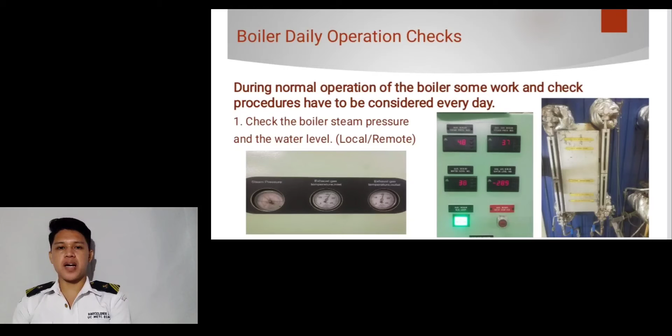Now let us start with boiler operation daily routine. First, check the boiler steam pressure and water level, local or remote. Why do we need to check the steam pressure? Because if the steam is not enough or doesn't meet the required steam supplied, it may affect the whole operations on board. Second, check that the feed water control system is operational.

It is necessary to check whether the feed water control system is operational or not, because if feed water is very low or high, it will send an alarm and it will delay the ship's maneuvering, and worst, it will cause severe consequences, which is explosion.

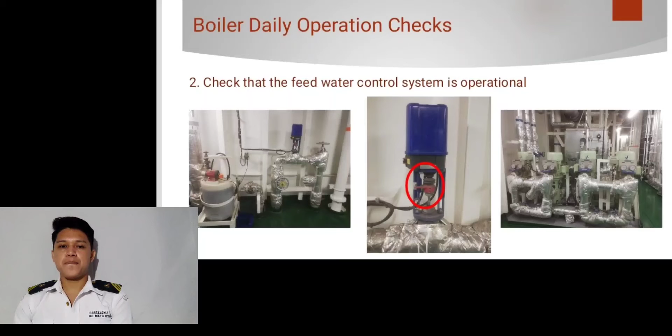The third is, check the boiler water condition and make necessary countermeasures with regard to the feed and boiler water treatment. If necessary, blow down the boiler.

Boiler water must be treated in order to be proficient in producing steam. Boiler water is treated to prevent scaling, corrosion, foaming, and priming. Chemicals are put into boiler water through the chemical feed tank to keep the water within chemical range. These chemicals are mostly oxygen scavengers and phosphates.

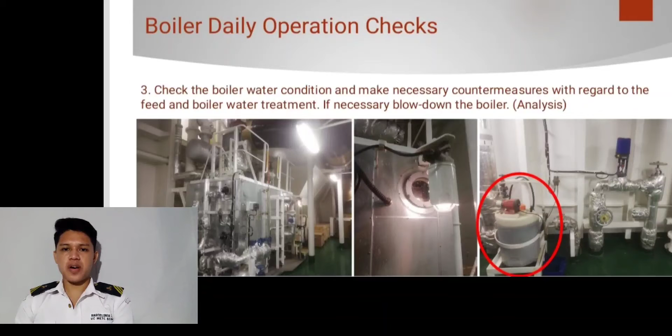Check the function of the oil burner at different capacities through the inspection hole on the boiler to ensure that there is enough fire to boil your feed water and produce steam.

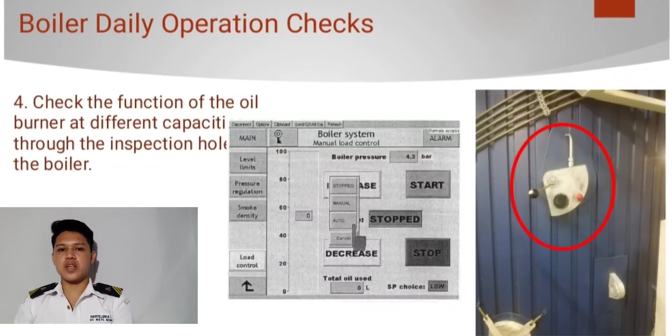The next step is to check the flue gas temperature after and/or the draft loss across the boiler. If either the temperature or draft loss is too high, the pin tube section must be cleaned.

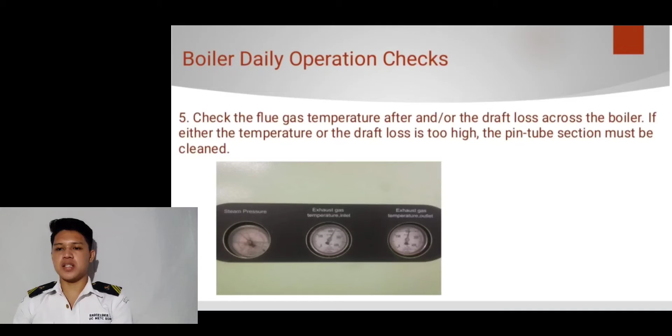Feed water treatment is a pre-water treatment process to control deposition, eradicate impurities, and prevent corrosion within a boiler system. In a boiler system, water is transformed into steam and expands by as much as 1,000 times as it passes through steam pipes at rates of 100 km per hour.

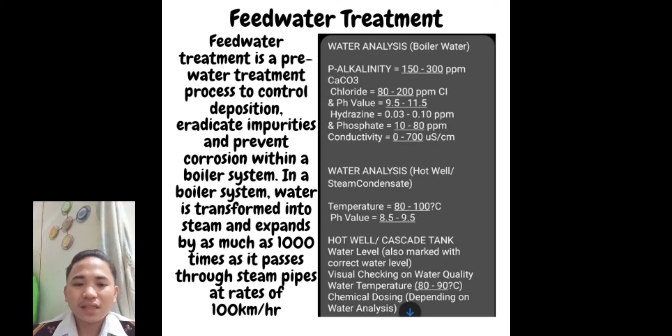Steam is necessary to move heat and energy from central boilers to its desired location. Without proper feed water treatment, a plant or facility that produces steam undergoes corrosion and scale formation.

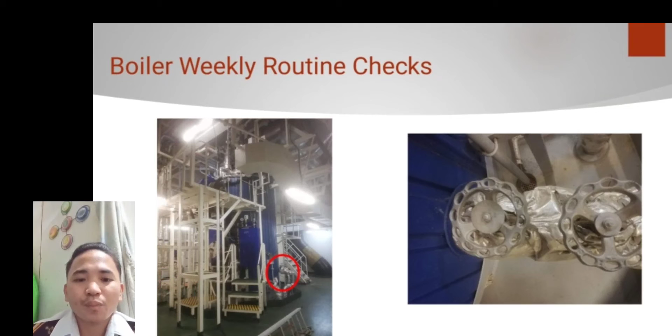I will be discussing also the weekly treatment. In doing the boiler parameters, we have the weekly routine check.

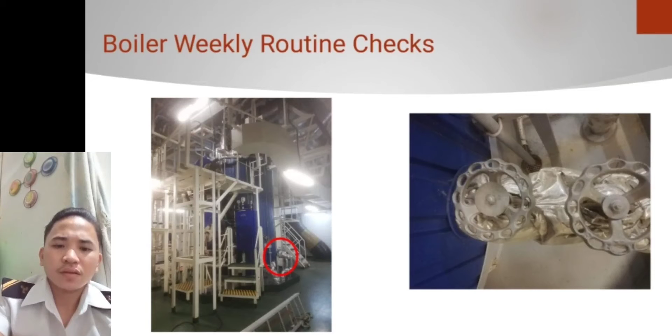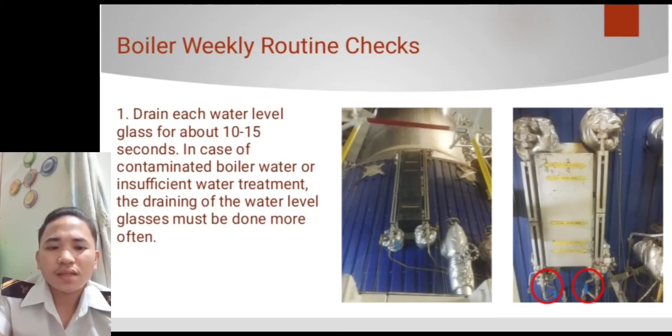First, drain each water level glass for about 10 to 15 seconds in case of contaminated boiler water or insufficient water treatment, and draining the water level glasses must be done more often. Second, check the safety water level device.

Depending on the boiler water tests, blow down the boiler. Open the blow down valves quickly for a few seconds and then close and open again for about 5 to 10 seconds. Repeat this operation when required according to the boiler water test.

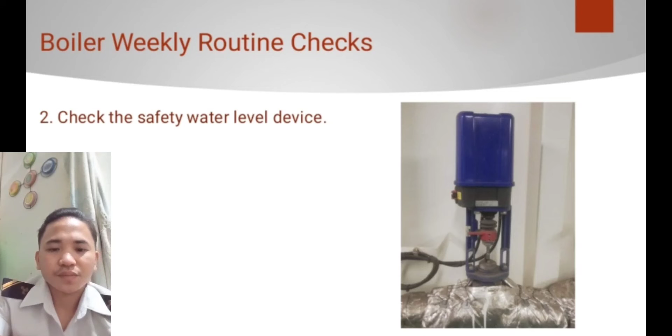Depending on the boiler water test, blow down the boiler, open the blow down valves quickly for a few seconds and then close and open again for about 5 to 10 seconds. Repeat this operation when required according to the boiler water test.

Boiler is one of the most important machinery systems on the ship, and economic and efficient working of a marine boiler requires timely maintenance and care while starting and stopping.

Routine clean-up is extremely helpful in increasing the working life of the marine boiler, and it includes blow-down of the boiler's drum to remove salts and impurities, blowing of the boiler tube, water washing of the tube, and blow-down of the gauge glass to check the true levels.

Number 4, perform a scum blowout by means of the scum valve. When required, the scum blowout must be carried out until the drained water is clean.

Boiler blowdown is done to remove carbon deposits and other impurities from the boiler. Blowdown of the boiler is carried out to remove two types of impurities: scum and bottom deposits.

Common reasons for carrying out boiler blowdown are to remove the precipitates formed as a result of chemical addition to the boiler water, to remove solid particles, dirt, foam, or oil molecules from the boiler water. This is mainly done via scum valve, following a procedure known as scumming, to reduce the density of the water, reducing the water level, and to remove excess water in case of emergency.

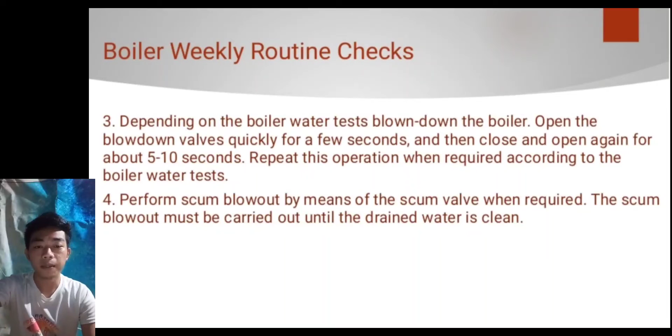Number 5: Clean boiler fuel oil pump filter. Filters mitigate the risk of new types of fuel that can cause excessive wear and tear for the engine components. However, different fuels can require a change in filter replacement intervals, which can be shorter than previously required. The typical filter spare parts are gaskets, O-rings, candle elements, and pressure switch.

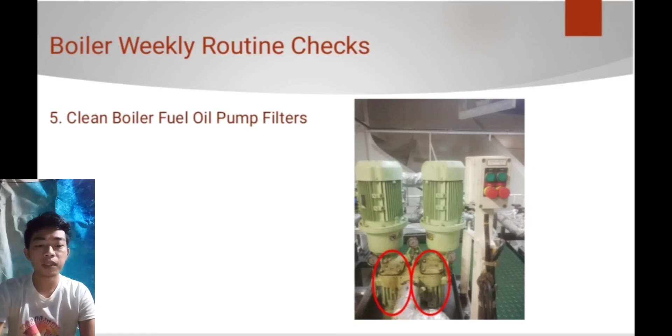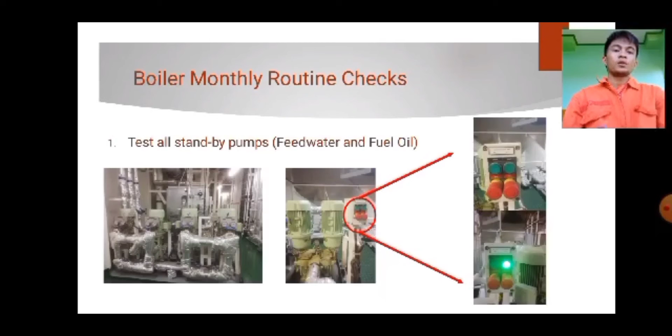I will discuss my part, which is boiler monthly routine check. The first one is test the standby pump in feed water and fuel oil. The second one is check all the boiler mountings for damage or leak, and repair or replace if necessary. Visual check around the boilers includes the following: safety valves, main steam valve, feed water valves, water level gauge, blowdown valves, air valve, sample valves, manholes, handholes, inspection hole, and drain for furnace.

Additionally, it's very important to check and maintain our boiler in good condition so that we can avoid or prevent accidents during travel. In such cases, we can use the daily, monthly, and periodic boiler maintenance checklist to ensure that the equipment is performing as efficiently as possible.

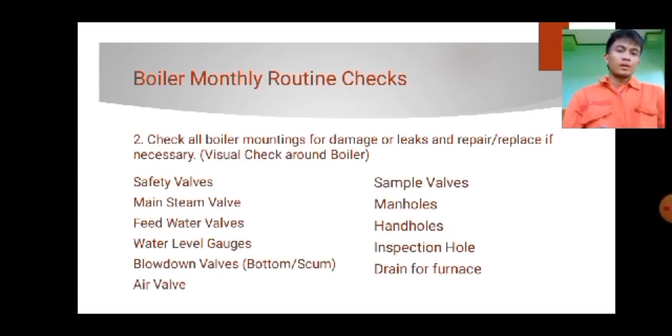And lastly, check the function of the high steam pressure switch by lowering the set point or by raising the steam pressure, closing the main steam valve slowly, and the boiler must stop automatically.

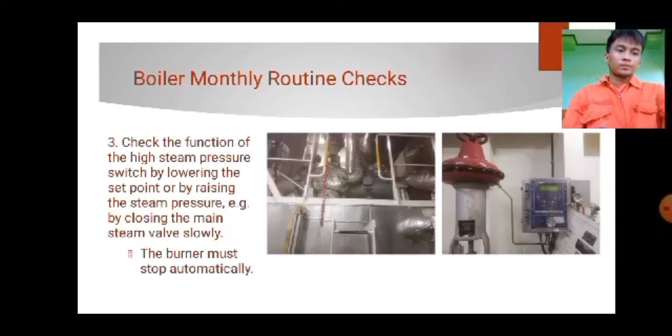Good day everyone. I'm going to discuss the boiler monthly routine check, and this is not just only for checking but also cleaning.

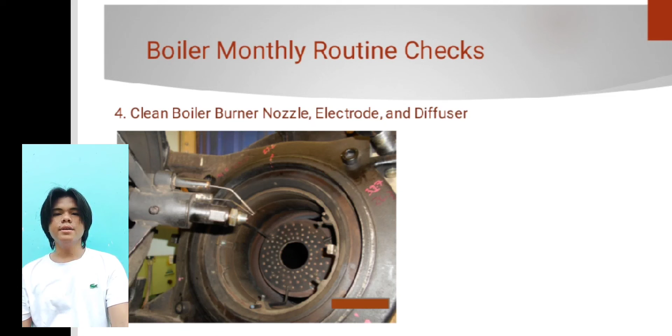The fourth monthly routine check: clean boiler burner nozzle, electrode, and diffuser. You need to check the burner nozzle if it is clogged or dirty, because there is a possibility it will decrease the performance of the furnace and make it more difficult to heat.

Next, we need to clean the electrode as well. We expect that the electrode will become dirty due to the combustion process. The cleaning material we use to clean the electrode is called sandpaper, or the term used on board ship is emery cloth.

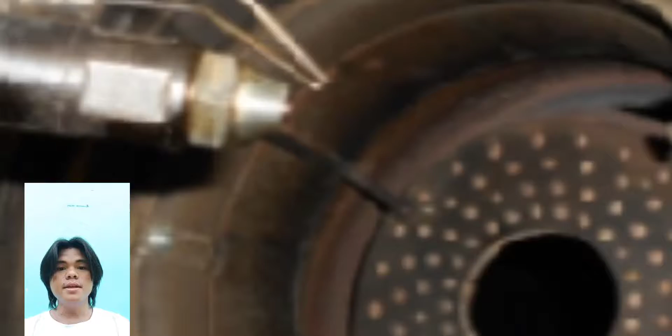Lastly, clean the boiler pin tube. The most effective way of soot cleaning a boiler pin tube is water washing, as most of the deposit consists mainly of non-soluble particles held together by a water-soluble bonding material. Water washing will dissolve the bonding material and wash the loosened and soluble deposits away.

Water washing must be carried out when the oil burner is stopped and the boiler has cooled down. However, the boiler should be warm enough for the water to evaporate so that the pin tube, elements, and furnace will not remain moist after washing.

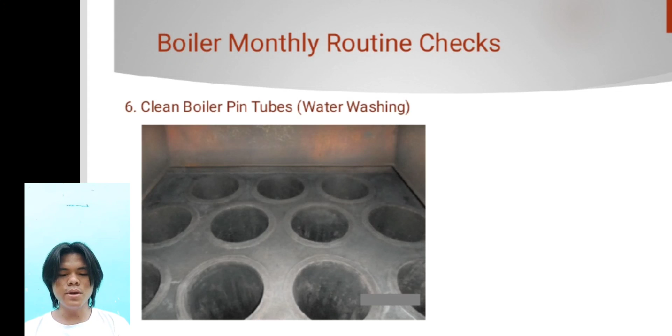Both fresh and seawater can be used. However, if seawater is used, the boiler must be thoroughly washed afterwards with fresh water in order to remove all the salt deposits. Where deposits are highly corrosive or baked, a soaking spray with a 10% soda ash solution is advisable before washing.

Additionally, how important is checking the boiler parameters daily, weekly, and monthly? It is important to continually monitor your boiler system daily, weekly, and monthly to help you identify any unsafe conditions or operational inefficiencies.

Preventative maintenance practices can be broken into daily, monthly, periodic, and annual services as a means to ensure that your boiler system is performing efficiently and effectively. If you notice a larger issue with your equipment during an inspection, be sure to schedule repair services to handle it before it becomes a bigger problem.

We also have put together a boiler emergency preparedness checklist to help you get started on contingency planning for your operation.